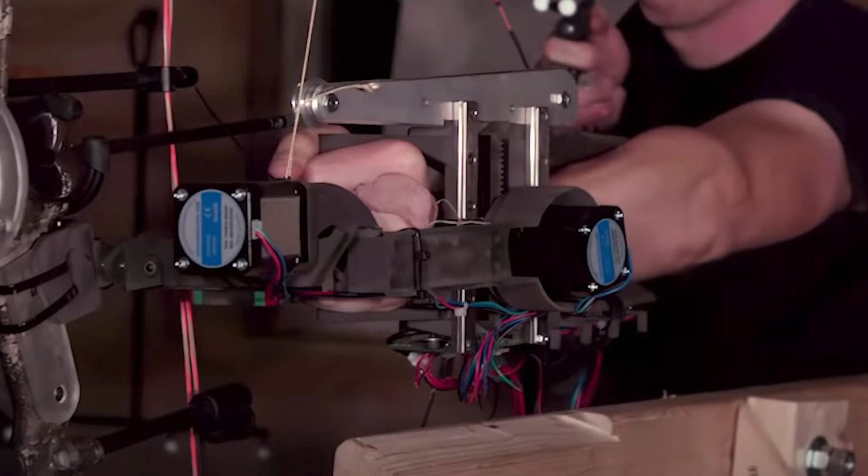So sometime last summer, I saw a couple videos from Stuff Made Here. If you haven't seen it before, you need to check it out. The guy who does it pulls off these inhuman feats of engineering and makes really entertaining videos about them. And the thing about these videos is he really makes it look like fun.

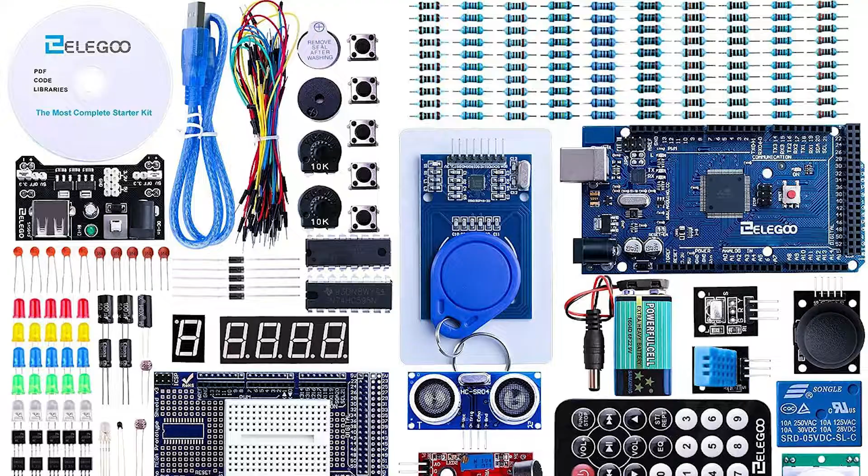And I realized I could be having fun making things, but I have no electronics experience. When I started this, I didn't even know what the red and black wire were or how to pronounce the word soldering. So I got on Amazon and ordered the Elegoo Mega 2560 electronic starter kit, and this was the best investment ever. It comes with dozens of sensors and input-output devices and a PDF full of lessons on all of them. You start from basically just wiring an LED with a battery, and by even halfway through it, you start to appreciate how you can just buy electronics components online and hook them all up together with a microcontroller to do cool things. By the way, that was not a paid advertisement for Elegoo, I'm just really impressed with their electronics kit.

So what is the punchline of this story? It's really that you're about to see a lot of bad electronics and engineering in this video. It's because I learned most of this stuff like a month before I even tried to use it for this project, and then I was time crunched to get it done before Halloween. So I wouldn't use this video as a how-to for anything. This is really just for me to document my experience putting this stuff together, and I think what I built was pretty cool, and I think my family had a lot of fun watching me struggle through it.

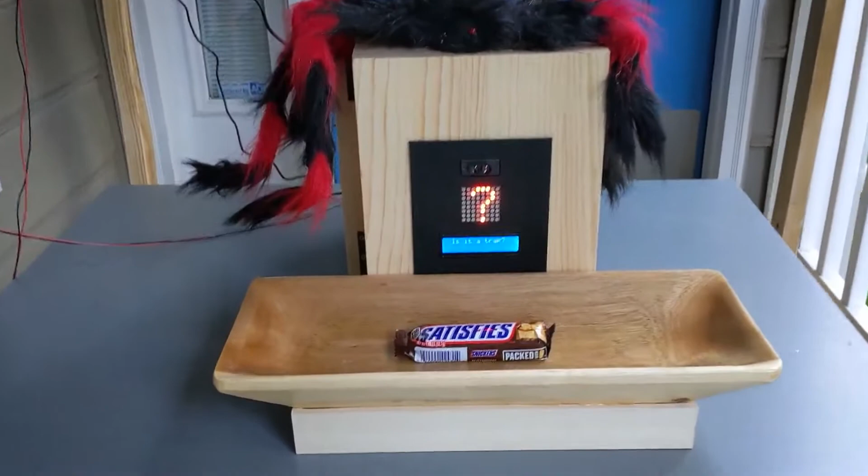So I would be sitting right here with a bowl of candy, and I would tell trick-or-treaters when they came up, here's some regular candy. If you want a full-size candy bar, you can go over there, but it's kind of risky. And of course, when they look up and see the shifting lights, they are obviously immediately intrigued. So they approach slowly. You'll see that it has a LiDAR rangefinder on the front of it, which detects your distance and then slowly makes the question mark less random until you actually get up to it and it becomes a solid question mark with the message, is it a trap?

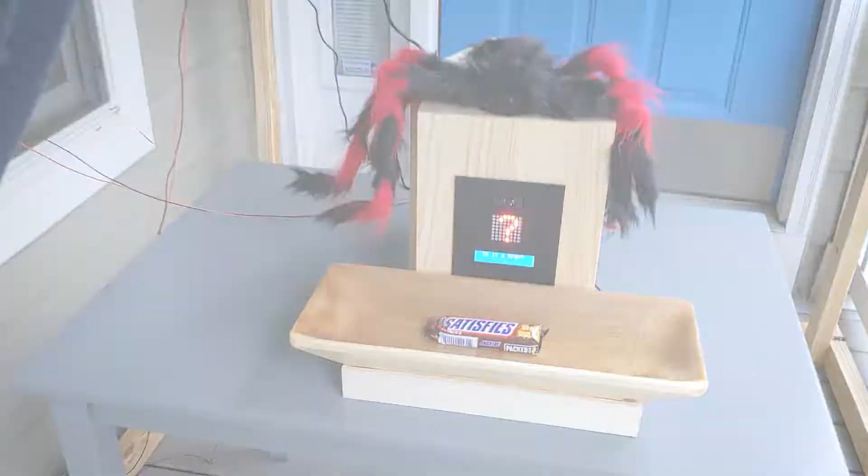And there's this beautiful bowl with a full-size candy bar in it. Obviously you can see over here lots of wires. That wasn't really visible last night, the curtain was a little more closed. So when they go in and grab the candy bar, there's a pressure sensor under here.

Motorcycle horn, spider drop, red eyes. And then the whole thing resets completely on its own. And by completely on its own, I mean it has some quirks, but overall it does actually work. It unspools to the right length, so it's ready for the next drop.

I'll show you in a bit how wildly complex that string unspooling became. This did end up being quite a huge mess of wires. Since I'm relatively new to electronics, I know that I have lots of room for improvement here. But, you know, it works.

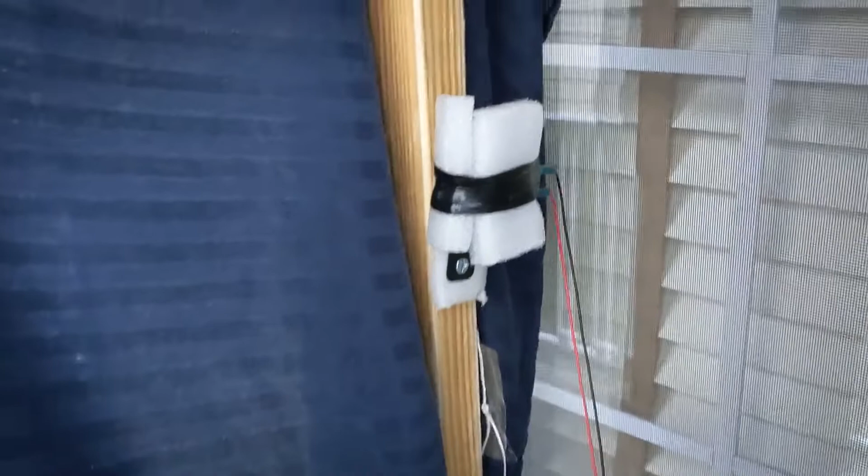Over here's the motorcycle horn. I got the quietest one I could, but it was still crazy loud, so I had to wrap it with self-fusing tape and padding so that it would dampen the noise a little bit. It was definitely still loud enough to cause kids to jump, but without causing a heart attack.

Of course, I tested this mostly without the spider, and then it frequently got stuck. One of the legs would get stuck on the string, and so I had to sit here and babysit it and make sure every time it went back up, the legs were not getting stuck, which would prevent it from dropping.

Here's the bowl that I created with the pressure plate that holds the candy bar, and I love this thing. I got this large, oversized, and especially suspicious bowl on Amazon, and I was really going for that Indiana Jones style feel.

I especially like it because that hinge switch has a really satisfying click to it, the kind that makes it abundantly clear to the trick-or-treater that they did something and something is about to happen. This thing turned out so well, I imagine it's gonna be part of every Halloween for years to come.

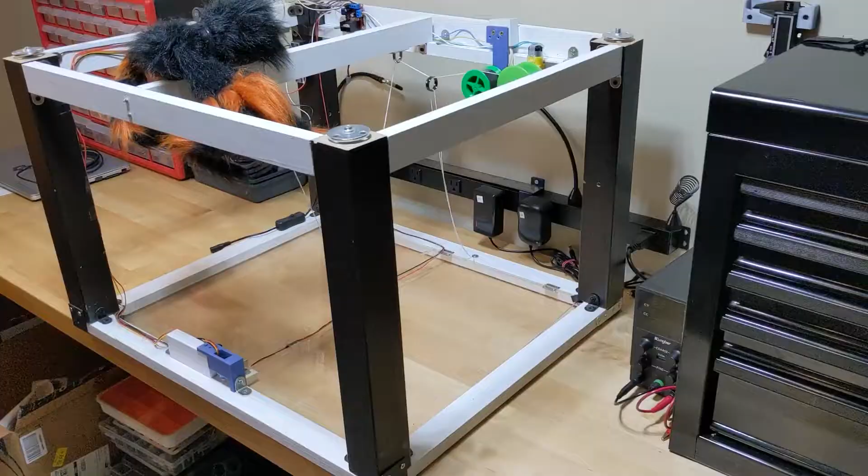So here's the spider drop box with the spider still attached. You can see the contraption I made here where I tried to do the door retraction and spider lift as a single mechanical motion. So he's attached to the string, which is attached through a loop on the door.

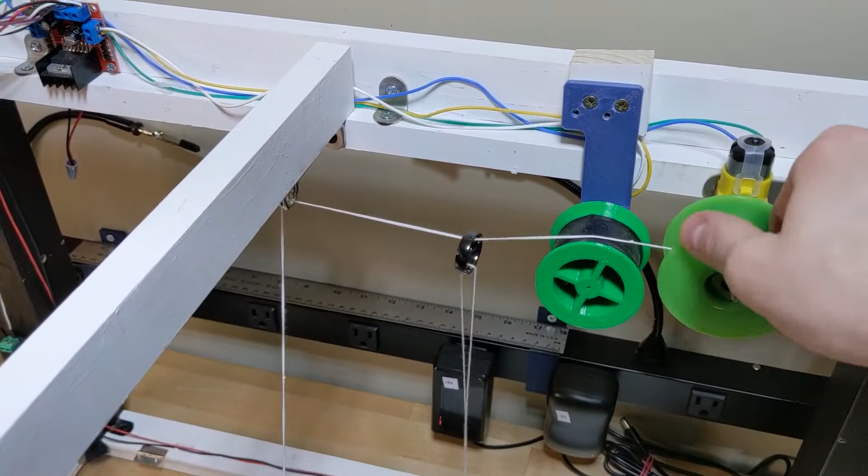And that goes over here to these motors. I'll have a little bit about why I've got 2 motors and my engagement ring and a whole bunch of strings. But that's another story.

The key, I guess, personal innovation here is that as long as the spider is lighter than the door, when everything is deployed and the spider's down and the door is down, pulling up on this motor should lift the spider first until it gets to here, and then any more that you pull will pull on the door and pull that up. Overall it worked pretty well. I was pretty happy with that.

Down here it gets a little funny, and that's because I have this little solenoid latch right here, which is used for holding the door up. You can see it, it's just a latch like you might have on a door.

I designed this originally without a whole ton of foresight, knowing this thing is powered and it can kind of work, but it's probably not very strong. I completely underestimated how not strong it was.

You can see I even put the wiring in to run it up to the microcontroller to try to trigger it, but it never worked. The thing barely has enough power to pull the latch open when it's not even under any pressure, but when it's holding the weight of the door, there's not even a chance.

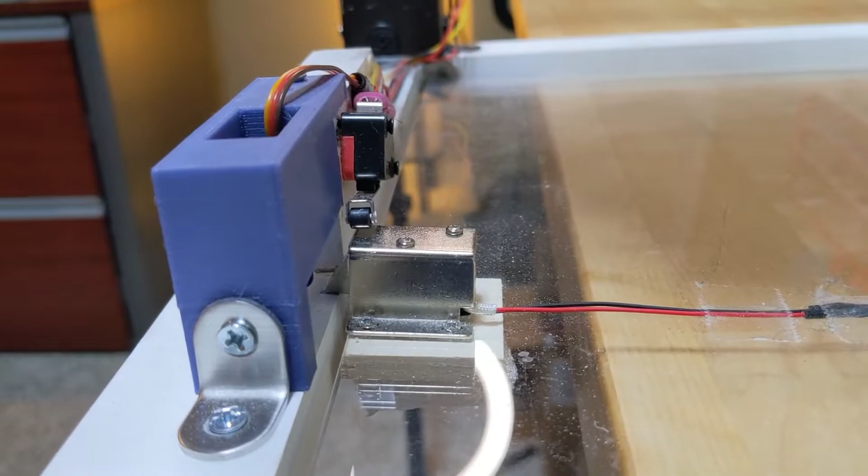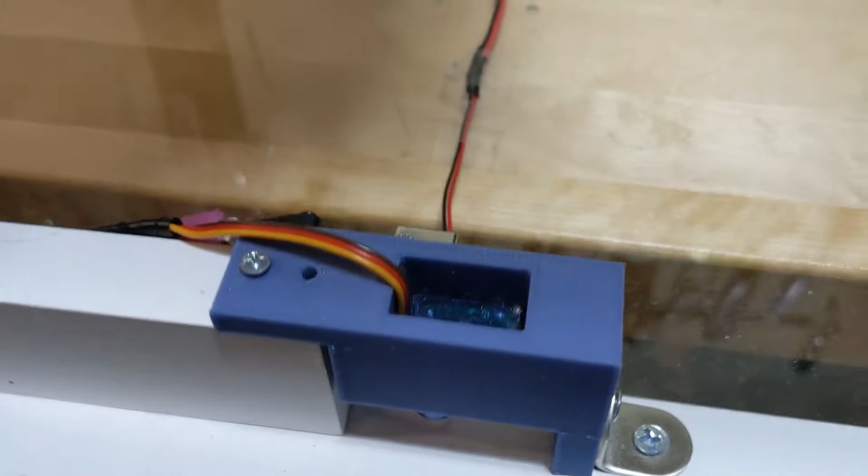So I had to get out my modeling tools. In Fusion 360, I made this really cool 3D printed holder for a servo. A servo is really just a small little motor, and its only job is it can swing an arm from 0 to 180 degrees.

In this case, the only thing it does is swing that arm open and kick the latch to drop it. Seemed kind of excessive to build this whole structure just to trigger that latch, but it worked perfectly.

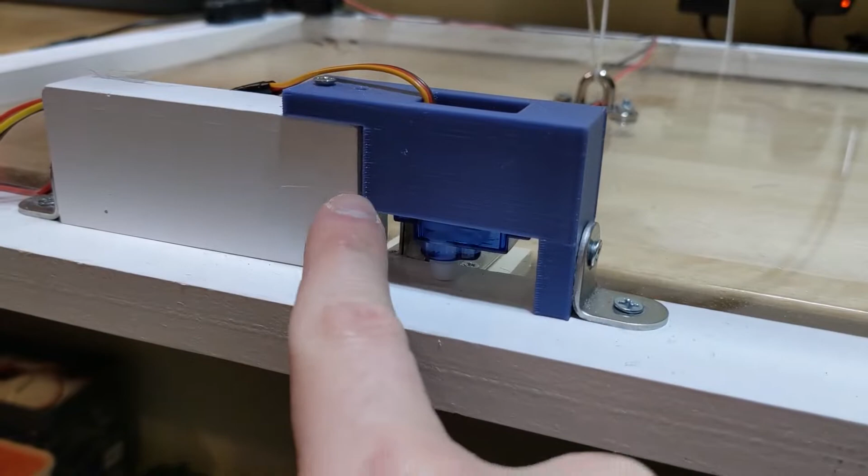The actual design for this part was super simple once I had the caliper. I was able to measure the servo and measure everything, and this whole box is basically just a box with a couple cuts. Just put the box in the 3D modeling software, cut out this box, cut out this box, and then cut out the hole for the servo to fit into.

Actually, that explanation of how easy it is in Fusion 360 would be a lot better if I just showed you how easy it is in Fusion 360.

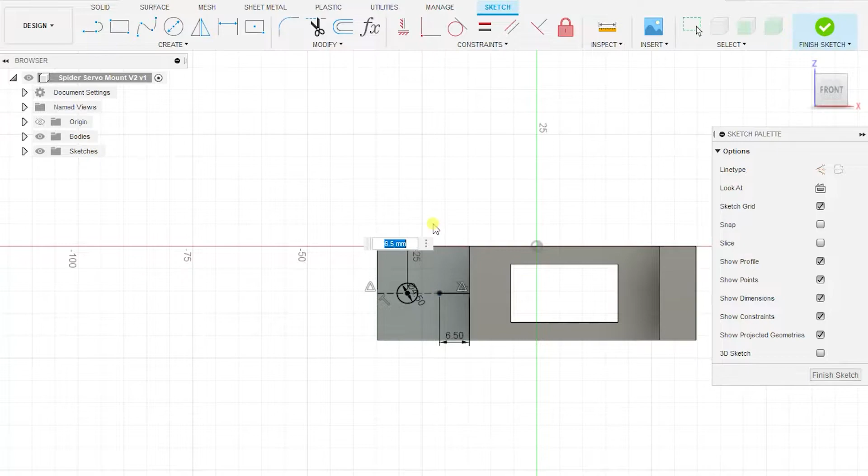Here's a quick demo of it. I love how crisp the motion is.

Anyone who's got experience building things like this probably is wondering, hey Alan, why did you not use aluminum extrusion for this? And I'll tell you, it's because I did not know about it. I cannot wait to tear this thing down and switch to using aluminum extrusion. I have a whole bunch of it now.

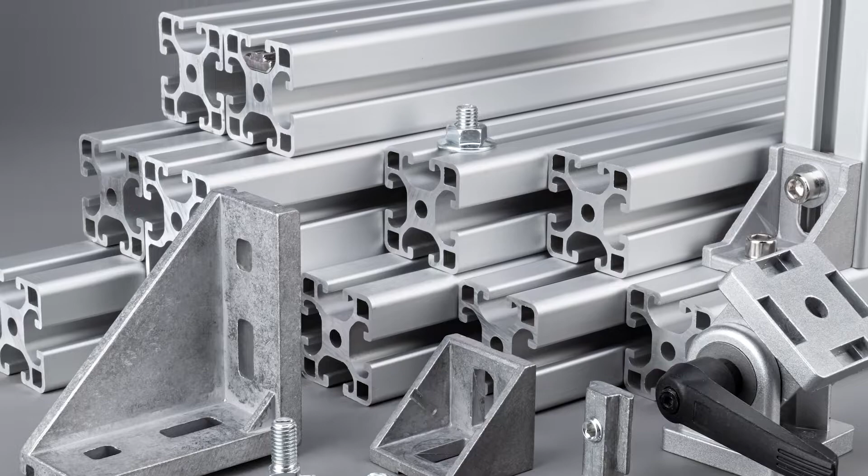So the key thing here with the electronics was down here I had the power supply.

I need the Arduino, or well, in this case it's actually a Seeeduino. Same thing—microcontroller requires 5 volts, but the motors need more than that. So that's what this is. This is called a DC motor driver.

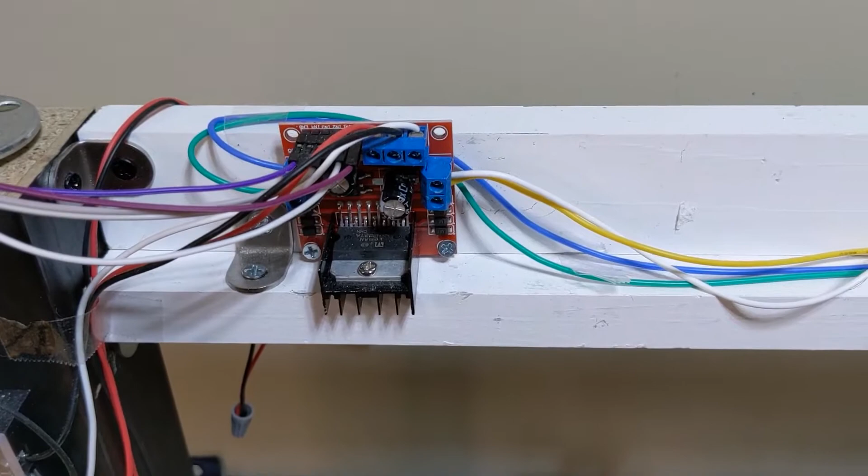This is pretty common in electronics, where basically the wires coming out of the motor are very raw. You need to pulse them or do funky things with them, and you don't really want to put all that logic on your microcontroller, or it may not be feasible. So you get one of these things, you plug your motors into it, plug your high voltage power supply up here, and then you attach your microcontroller to it, to these other pins.

It gives you a really simple interface where basically you can just put in your code, spin the motor clockwise at a given speed or spin it counterclockwise at a given speed. Pretty simple. And actually it can run 2 motors at once, which turned out well because I ended up with 2 motors. I'll get into that in a bit.

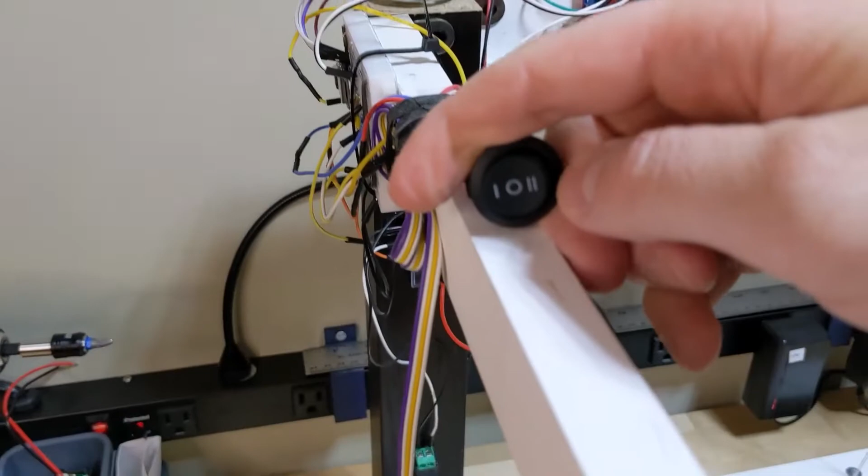The wiring got messy because in addition to needing everything to be hooked up and managed automatically, I needed some remote switches. So this is a forward and reverse for the motors to pull the string up or down manually. I also have a manual drop switch, which I just pulled from an old computer.

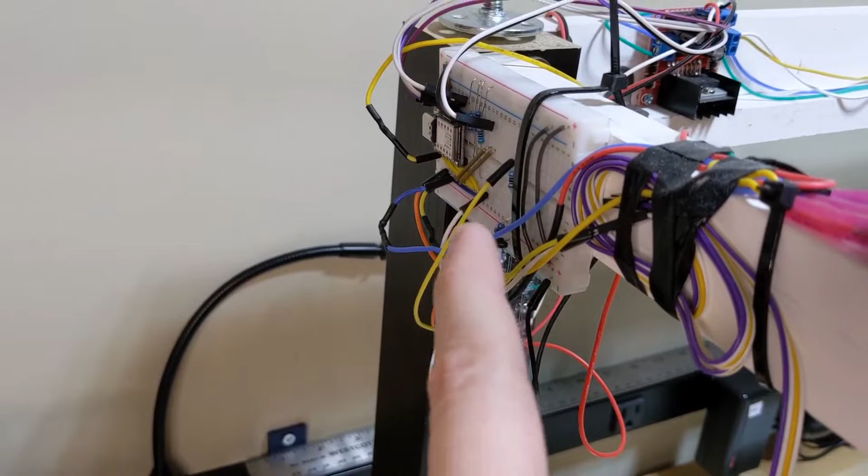Nothing's powered right now, but I can just click that and it will trigger the same logic, as in fact it even uses the same pin as was used by the pressure plate. So it's not here, I've disconnected it, but I had 2 wires here that went in that were connected to the pressure plate and that box.

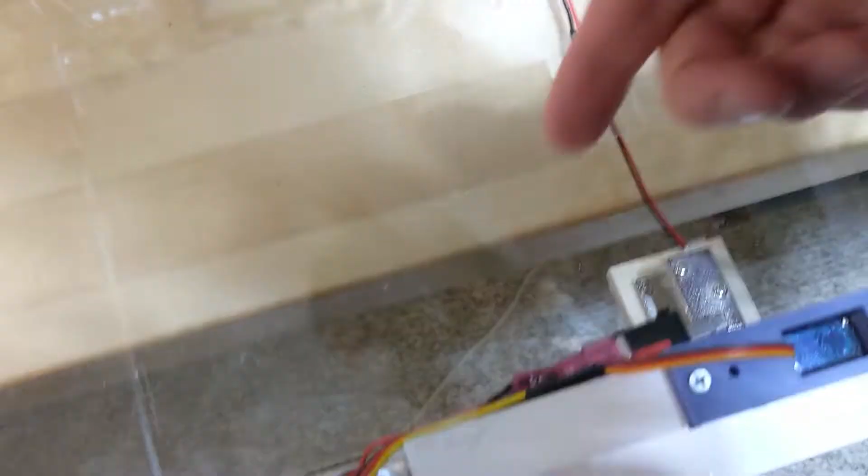One last problem I had that I wanted to share was you can see all these wires running up to the microcontroller. They're all actually relatively long wires, and whenever you look up tutorials or guides for any devices and sensors, they typically use really short wires. If you look up something like this hinge switch right here, all it does is complete a circuit, and the microcontroller can detect when something goes from 0 volts to 5 volts.

The problem is that these really long wires basically act as antennas, and they just pick up random interference from, I don't know, the cosmos or wherever, things from around your house. So sometimes I'd just be sitting here and it would just trigger on its own. One time it actually had the motorcycle horn hooked up, and I was just sitting at my desk and the whole thing just went off.

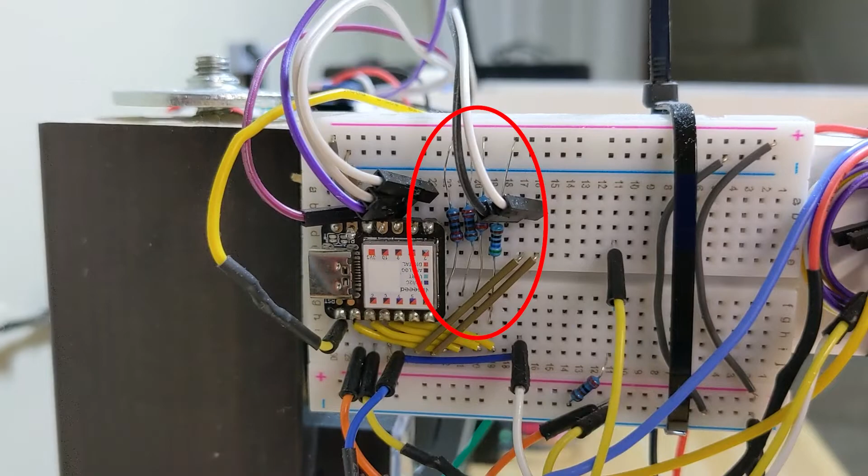So the solution here is that you have to strengthen the baseline signal so that it doesn't accidentally trigger like that. That's what all these little resistors are here for. I had to learn how to create what's called a pull-up resistor and make it strong enough to overcome any kind of that interference.

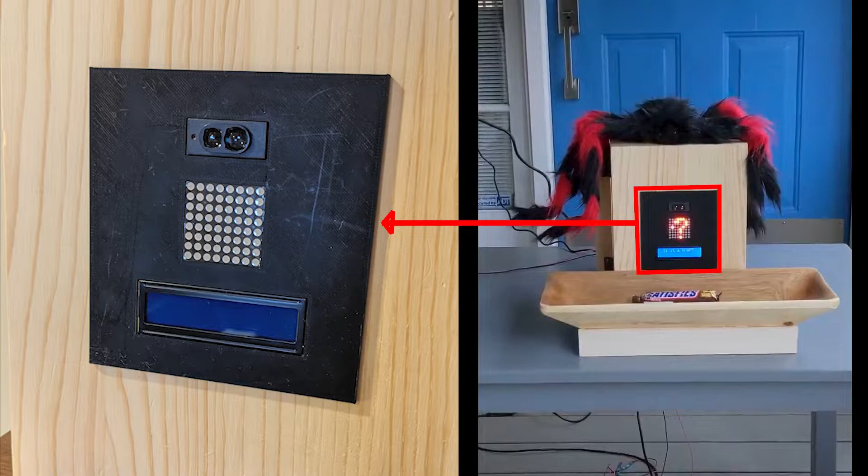This is the box and faceplate that was behind the pressure plate, and I think this was the most fun part of the project for me, but probably also contributed the least to the overall effect, just because it was dwarfed by everything else that was going on. But it was fun, and I think I'm going to try to use it again in a future year.

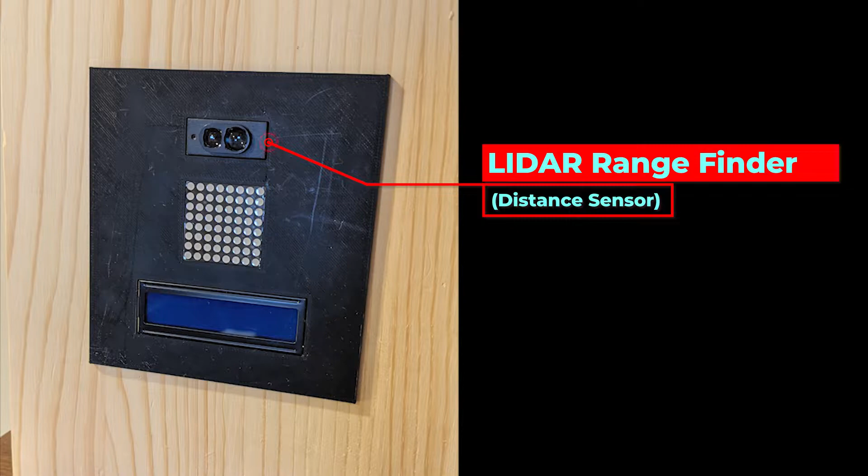At the top, you've got the LiDAR rangefinder, which is used to detect the distance as the person is approaching. Below it is an 8x8 LED matrix, which I was able to program with the microcontroller to display a question mark with variable levels of randomness. And below that is a text display, which can display up to 2 lines of text, 16 characters long.

I had some ideas for what to do with that, but at the end, I couldn't even count on kids being able to read it, or that anyone would even notice it amidst everything else going on. So it basically just displayed, 'Is it a trap?' and that was all it did.

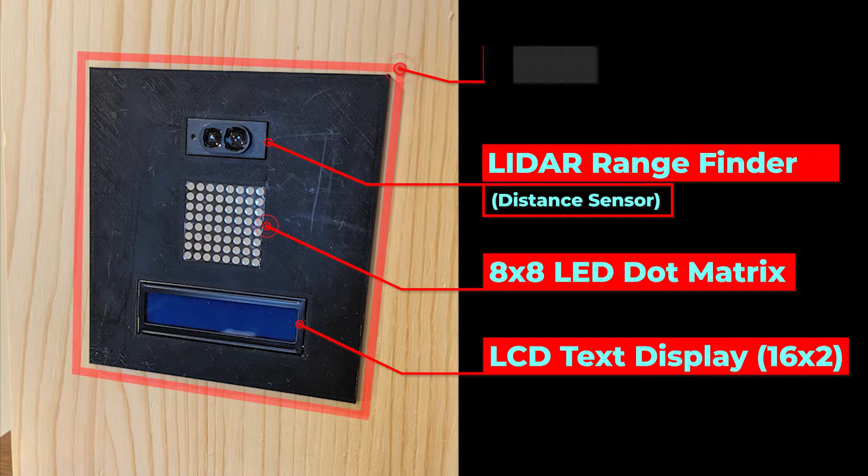Finally, I needed something to hold it all together. So I tediously measured every single one of these things and made this 3D printed faceplate for it, which unfortunately I had to print like 12 times. But it did force me to learn all the tolerances of my 3D printer and how to correct for them.

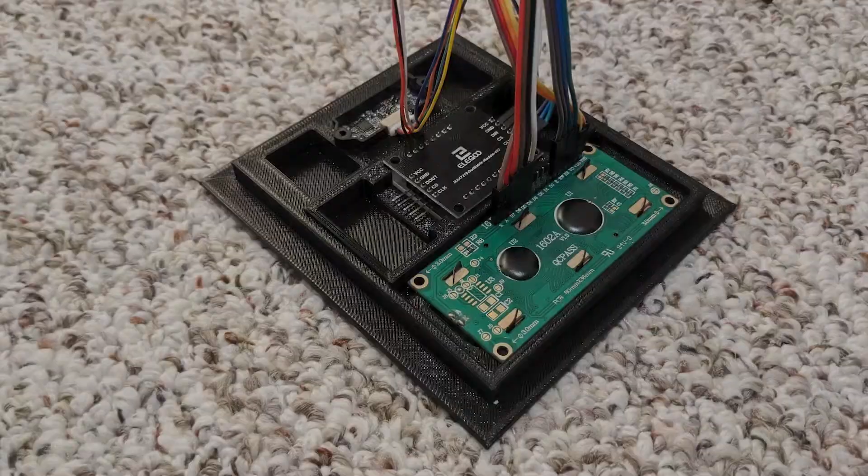When it was finally all assembled, I programmed it to have this shifting question mark, depending on the distance measured by the LiDAR rangefinder.

When no one was in front of it, or when the person was really far away, it would just appear totally random. But as they got closer, it would start to solidify until it was a completely solid question mark—hopefully adding to the intrigue that probably no one noticed.

All right, let's finally talk about this elephant in the room I've been foreshadowing for this whole video. In between spider drops, I need to lift the spider up and then create slack so that when the door opens, he drops at the right height.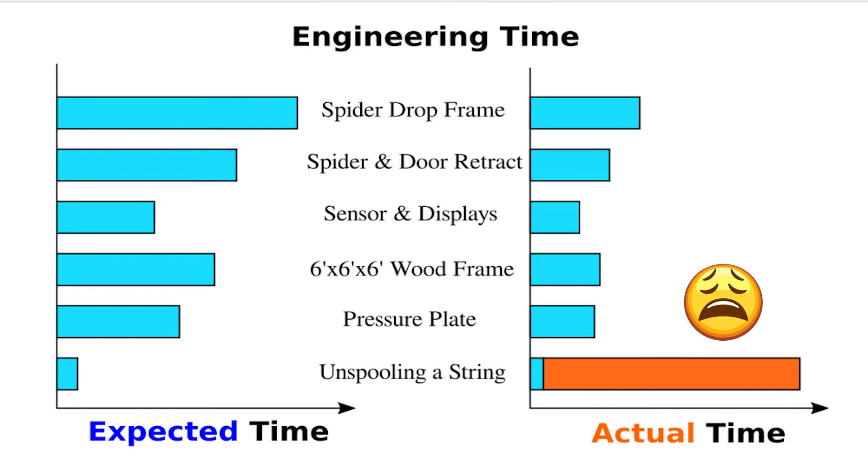If you had asked me what I thought would take the most time when I started this project, it definitely would not have been unspooling a string. I mean, how hard can it be to just roll the motor backwards to create the slack for the next drop? Simple enough, right? But alas, this ended up being the bane of my existence for like 3 weeks, and partially responsible for why I was so time crunched at the end, because I could just not get this to work.

Let me show you why. Here's one of the first tries of the system with only one motor, and everything seemed to work great. Success! But then, this is how it looked every other time I tried it.

Hey, what's going on here? Bad motor. Okay, maybe that was just a fluke. Let's try it again. Okay, maybe we just need to go slower. Surely that'll work. Nope.

I tried faster, I tried slower, I tried different string, I tried bigger string, I tried big rope, although it didn't fit. Nothing I did fixed this problem. So what was the problem?

Here's my theory: the string is a little bit fuzzy, like a soft Velcro. When the motor pulls it up and retracts the spider and the door, it effectively stretches that string, and then it wraps it around the spool in contact with other string that is stretched. When you start to unspool that string, it loses its tension and grips to all the other string around it. The most obvious solution is to simply add a weight to the slack string, which will pull down the string, overcoming the force of those threads grabbing onto each other.

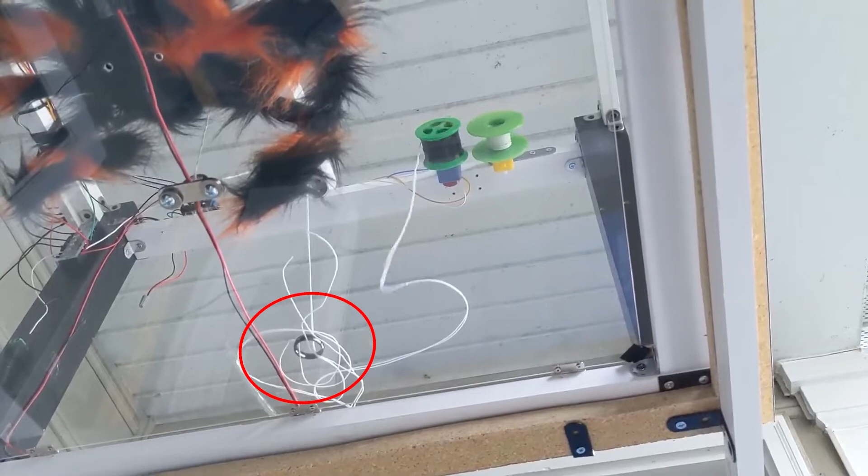The problem with this, though, is that we need a lot of slack, and whatever weight we add to it is going to hit the bottom of the box before we've finished unspooling. So it really only solves half the problem.

My next best idea was to add an extra spool and motor with a rubber grippy coating around it, which would spin really fast while the string is unspooling—hopefully adding just enough grip to pull the string along with it. However, at the very beginning of unspooling, there's actually very little contact between the string and that spool. And even where it does contact, the string isn't heavy enough to create any significant force against the spool, so the spool just spins freely under it.

However, if I combine both these ideas, they complement each other's weaknesses. The weighted ring will pull down and get the initial slack going, and by the time it reaches the bottom, it's created enough slack that it kind of wraps around the second spool, and the spinning of that spool will then generate enough tension to finish creating slack.

By the way, that last string that goes from the ring to the bottom of the frame is really just there to prevent the ring from getting sucked into the spool when it's pulling the spider up. Look, I know this is some major over-engineering nonsense, but you know what? The nonsense worked. I did not have it fail a single time after I put this in place.

There's about 800 other things I would love to share about this project, but I think that wraps it up nicely for you guys to get an idea of everything I went through to get this thing to work. So this video was more about my adventure learning electronics and coming up with this crazy idea and barely pulling it off for Halloween.